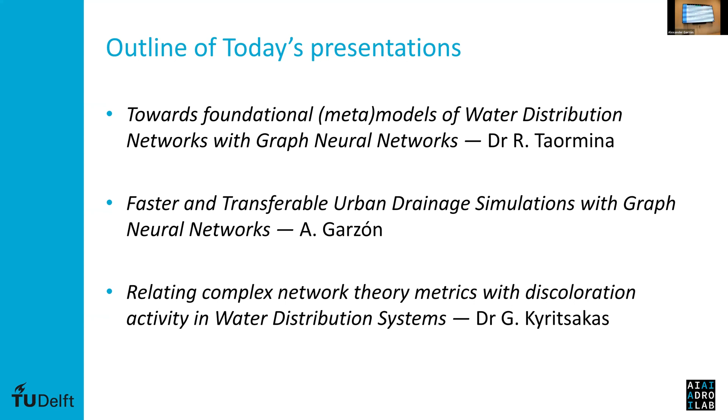So you can see the first talk is going to be on graph neural networks to build meta models for water distribution networks, which is a type of water network. Then Alex is going to have another talk in which he also mentions transferable meta models, but for sewers, urban drainage. And then lastly, we go back to water distribution. A different application now is not going to be graph neural networks, but it's going to be complex network theory along with machine learning methods to solve an important problem in water distribution networks again.

Now, the first part should be like a generic introduction to the topic, because I guess the audience is very varied. So yes, urban water networks and why we want to use graph machine learning. That's the first part of the talk. So let me give you some context. We are in the urban water cycle. Okay, what does this mean?

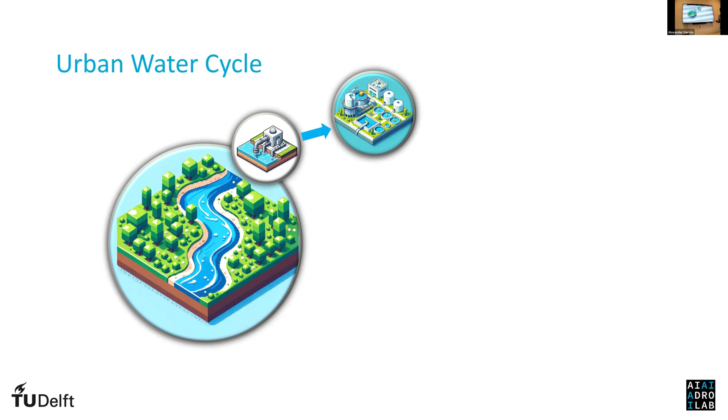This affects everyday life, including bringing water to firefighters when they need to extinguish a fire. Usually you have a source of water; in this case it could be a river, could be a lake. In some parts of the world it is actually the sea itself with desalination plants. It can be the groundwater. So we have this source of fresh water, and then we have water that needs to be treated to become potable, drinkable, and then it can be sent to cities via transmission pipelines.

And then we have our city here, and we need this water to do everything essentially, for our households, industrial processes, commercial, anything. We really depend on drinking water. We consume this water, this becomes wastewater, and we need to get rid of this wastewater and bring it back to the environment. But we need to treat it first in wastewater treatment plants, and then we can release it into the same river, hopefully downstream, so you don't have to drink what you just treated. And that sort of closes the cycle.

We need an extra component, though, because, especially in the Netherlands, we have a lot of rainfall, right? So this is water that falls on our streets, on our roads, on our buildings. And it gets polluted because there is a lot of pollution in the environment around us, and needs to be treated as well. And ideally, it then needs to be shared back with the environment with a concentration of pollutants or pathogens low enough for safety reasons. Okay. Now, this is all the urban water cycle, and that's already a lot.

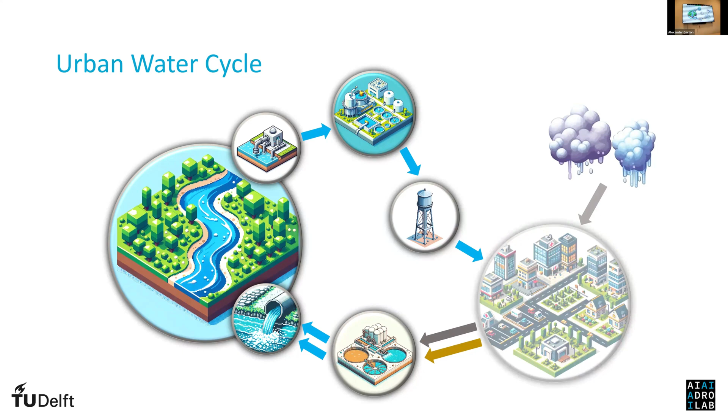But when we talk about networks, we focus on this part alone. Urban areas. Why? Because we have this water treatment plant, we have drinking water, this water comes to our city, and then is distributed using a network. It's not done point-to-point, because it would be very inefficient. And this is the same as power distribution, road networks, telecommunication. Indeed, we have a network. And when we talk about delivering drinking water, we have a water distribution network or water distribution system. So we want to deliver water with high quality to as many people as possible, and with sufficient pressure. It means that you open the tap and the water comes out.

So it's not just the quality of the water, it's the quantity, it's the energy linked to the water, because pressure is, of course, related to energy. And from the sources to any type of user: residential, commercial, industrial, sometimes also farms, and so on and so forth. So this is the first type of urban water networks.

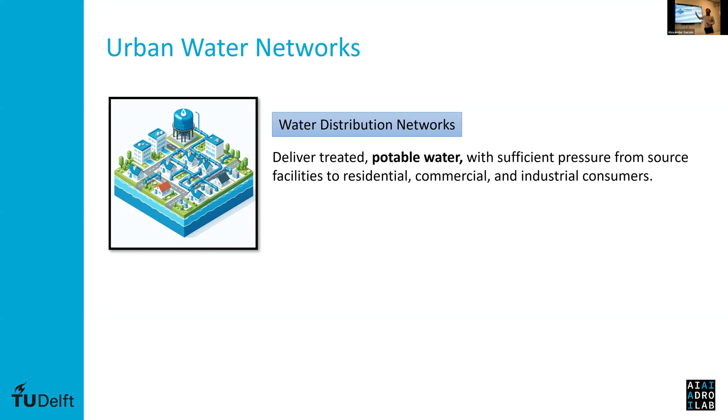This is like the light side of the force, some people call it, because then we have the dark side of the force, which is sewage. So this is everything that I mentioned when you close the cycle, right? You use this water, you produce wastewater, and for sanitation reasons, you need to take this wastewater away from cities, of course. And that's why it's also called the dark side of water networks.

But we also mentioned stormwater, because we have rainfall. Rainfall washes off these pollutants. We want to avoid sanitary problems related to that. We want to avoid situations of flooding. So we need to take this water away too. We collect it first using sewers, and then we take it away from the urban areas.

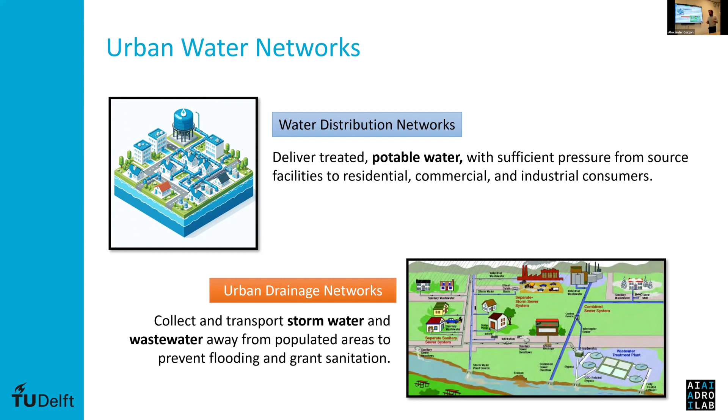Now, sometimes, especially in places like the Netherlands, you have these two functions, the wastewater or sanitary sewer and the stormwater sewer, connected. We have slightly bigger pipes. They're called combined sewer systems, mainly because the Netherlands, for instance, is highly densely populated. So it's actually quite impossible sometimes to have two pipes next to each other. You only want to have one. And that's why, if you're in the field, more often than not, you also hear the term combined sewer systems.

Now, regardless of the networks that we're talking about, these are physical networks. I don't know your field, but a huge part of graph and data related applications deal with non-physical networks. So here it's pretty much different, for many reasons. I'm going to list a few. Our node and edge features, these attributes, actually do have physical meaning. Pipe diameters have a physical meaning. Flow rates, the amount of water flowing into a pipe, have physical meaning. Same goes for the fact that physical systems have to obey physical laws. As such, we need to follow the laws of fluid dynamics for a water network.

These laws are very different if you think about a social network, where it's not physical; user behavior or social norms, you cannot call them physical. They're still very important laws, maybe less understood, but a big difference. Another big difference is consideration of spatial relationships. Literally, if you have a pipe which is a kilometer long, there's going to be much more energy lost carrying water from point A to point B than if it were 10 times smaller. So there are physical implications.

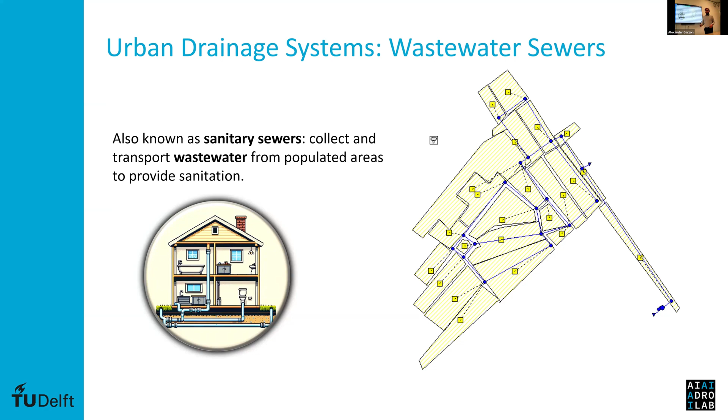And as I said before, we have stormwater sewers. They take runoff generated due to storms and rainfall away from populated areas to avoid flooding conditions, as you can see here. Then we have wastewater sewers, also known as sanitary sewers. And as I said before, you can imagine all the wastewater that we produce in the household, in an industry, in a commercial building, and this has to be carried away from the city after being collected using this network. Then we have the possibility of combined sewer systems, as I mentioned before, okay?

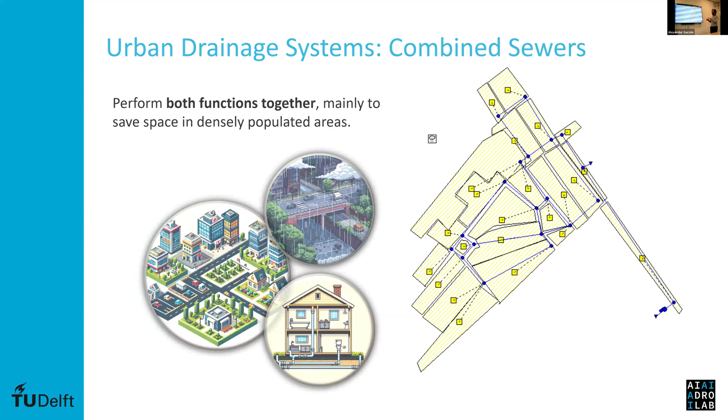Now, I don't want to spend too much time defining the node and edge features that we have for this type of system. Some of them are the same, okay? At least those that you need to know for the rest of the presentation, and I guess Alex is gonna provide a little bit more later on. But in general, these systems are actually more difficult to model than water distribution systems. The dynamics are more complicated, so just bear this in mind. We don't have too much time to go into that, unfortunately.

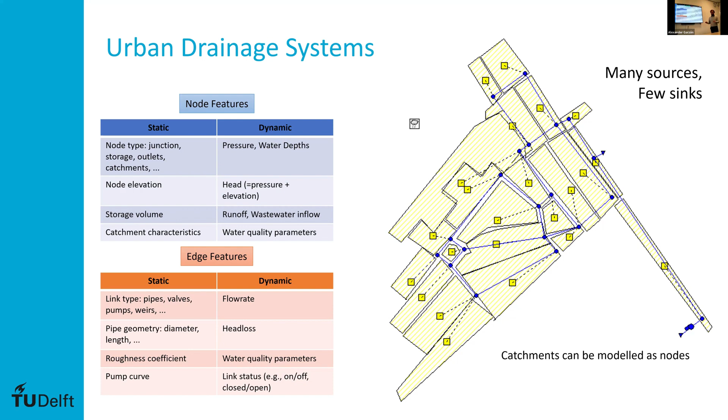Now, what's next? Now we move to graph machine learning. We defined these networks, right? Why do we want to use graph machine learning, which is going to be this talk and the next talk, and somehow also your talk? There's feature engineering in between, but I think we do it a deep learning way, end to end. Of course, we are dealing with networks. We want to exploit the inductive bias of this data being a network in itself or coming from a network, right? So we use graph machine learning. We exploit the important information that we have on this structure, rather than giving it away if we use machine learning models such as multi-layer perceptrons or random forests or extra trees and other types. So it should make a lot of sense. Okay.

Hopefully I will convince you more in the next slides. Now, we want to do graph machine learning, so we can do some specific graph machine learning tasks in these water networks, regardless of whether we have water distribution or urban drainage systems. What are the most common? A very important one is state estimation.

I think it has many synonyms from place to place, from application to application. But in our case, what we want to do is to infer the state of the network, meaning that we would like to know the head or the pressure and the flows everywhere in the network, ideally, from a few sensors that we can deploy in the system. Usually we're dealing with continuous variables, so this is a problem of node or edge regression.

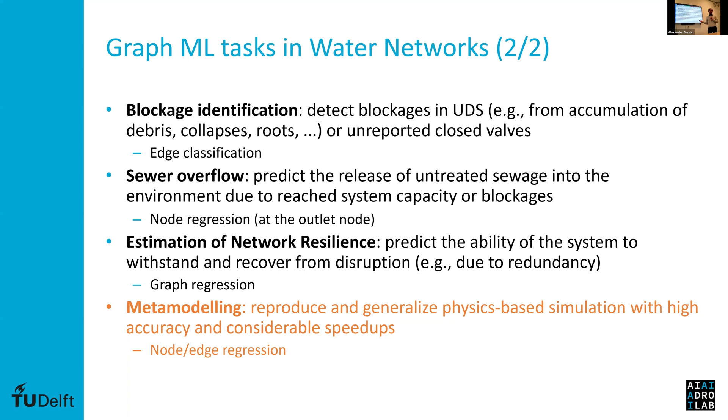We want to reproduce and generalize this physics-based simulation on a network with high accuracy and also considerable speed-ups. So we want to run it 10,000 times faster, 1,000 times faster. It's also known as surrogate modeling. So maybe you heard it before, this idea of building a model from a model. I hope in the next slides I will show you why this is indeed important. And this is the second and last part of my presentation. I hope it's not too long already.

One of the goals of AIdroLab, among many, maybe too many, is that we want to build transferable meta models for these water distribution networks. We'll unpack this in the coming slides. This work is being mainly done by one PhD student who is affiliated with AIdroLab, Bulat Kerimov, although he's doing his PhD at NTNU. So I'm presenting mainly his work.

If you go on any website of any provider of software solutions or sensing solutions for water systems, it looks like we are working with machines as sophisticated as Red Bull's super fast cars. They show these amazing graphics with different variations of this AI-generated drop of water with a wireframe, or a pipe with a wireframe, as if everybody's using AI to build these digital twins in the water sector. You heard the word many times, right?

If you look at these websites, if you go to these conferences, it feels like this is pervasive. We have so much data coming from this network, very high quality data. We can do everything with it. We have a sophisticated SCADA system that you don't even have in a shuttle, right? If you just look at this sort of advertisement. It is not true because, where is the data?

In a conversation with Elvi maybe two months ago, at one of the other meetings, he was a little bit surprised by the density of sensors, that is, how many of these edges and nodes we're actually measuring, okay? There's 3. I would say you'll be lucky if you have one sensor every 1,000 meters of pipes, okay? Usually, not always the case, but yes.

So I work with a lot of networks from the UK, one of the water utilities there, and what you see is that they usually have 3 sensors. They have a flow meter at the beginning, where they measure how much water is coming into the system. Then they have a pressure sensor in the most important part of the city, the city center, where you really want to ensure that the pressure is good, maybe the most populated area. And then you have another sensor at the so-called critical point, where the pressure is the lowest.

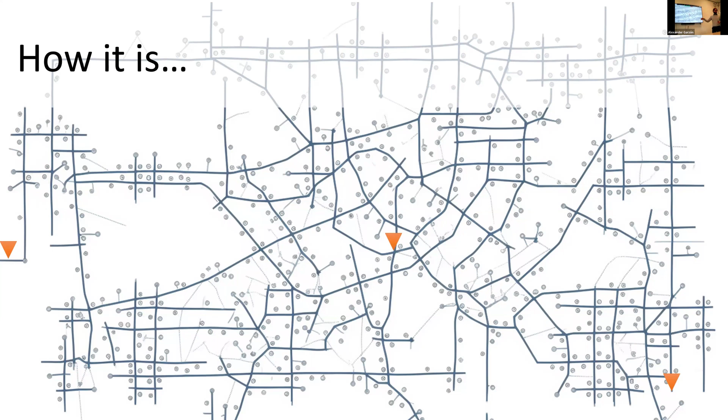Because if it's high enough here, you can expect that most of the customers are getting water. This is it, right? This is the reality, okay? And this is the UK. It's not where you actually have more need of sophisticated techniques to improve water management, right? So this is puzzling, but this is the truth. Therefore, what can we do, right?

What I mean by this is that GPT, this foundational model, sees a huge amount of data, and then we can use little data for a specific case, because the data seen to build ChatGPT from GPT is orders of magnitude less, right? A lot less. Maybe we can do this, okay? But where do we transfer from? Meaning, can we actually build a foundational model for water distribution networks? So this is the main research goal of this line of research that we are following at AIdroLab.

Now, imagine we have a lot of different networks. Usually, we don't have data from these networks, but we sometimes have calibrated numerical models for them. So I'm a water utility, maybe I have only a few sensors, but since we're dealing with physical systems, there are laws, and you can solve the related equations numerically, and use the little data that you have for calibration. And then you say, well, it's a physical system, it has some sort of reliability, although this is synthetic data most of the time, okay?

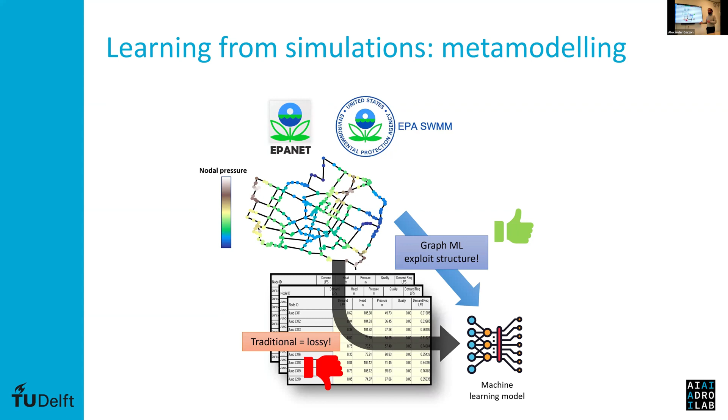Anyway, so this is how we can learn from simulation. We have a model, we run it, we get data from it, we use it for training our graph neural network. And again, now I'm going to focus mainly on water distribution systems. As I said before, these numerical models solve a set of equations. So what are the equations? The basic physics, let's say, behind water distribution systems under certain conditions, of course, with some assumptions.

We have the conservation of energy that we need to respect. By this, we mean that the difference in the energy measured by the head, which is one of the variables that I defined before, you can think of it, again, as the pressure plus the elevation. The difference between the energy in these 2 points is equal to the head loss, the amount of energy that we lose because the water passes through the pipes, due to friction.

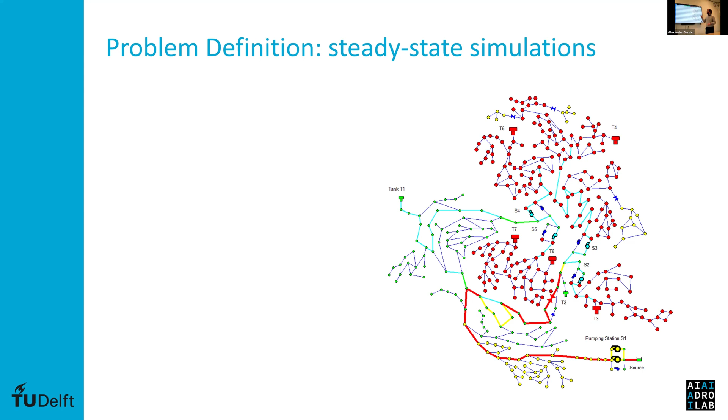Okay, so let's define the problem. We want to learn from simulations. Which type of simulations? We start with steady state simulations, which in the case of water distribution systems can help us solve a lot of problems. It's very different from urban drainage systems, where we usually don't have that luxury. But in this case, yes. So what is the problem that we want to solve? Given inputs, inputs being, of course, the network geometry and the characteristics of the network, the water demand requested by all the nodes of the system, which can usually be estimated, more or less, right?

And then we need to also know the intrinsic energy that the water has, the starting point, which is basically the amount of energy that we have at the reservoir, at the source of the water distribution system. That's the source of water. In this case, let's say we have a water treatment plant, and then there is a big pumping station that pumps this water with a certain energy.

The more energy that we have, of course, the more we can deliver water far away in the network. But of course, if it's too much, then we break the pipes and it's not great. So that's another problem that we're not going to discuss today. So given these inputs, we want to determine the pressure, usually at all the junctions, ideally, and the water flow in all the pipes, okay?

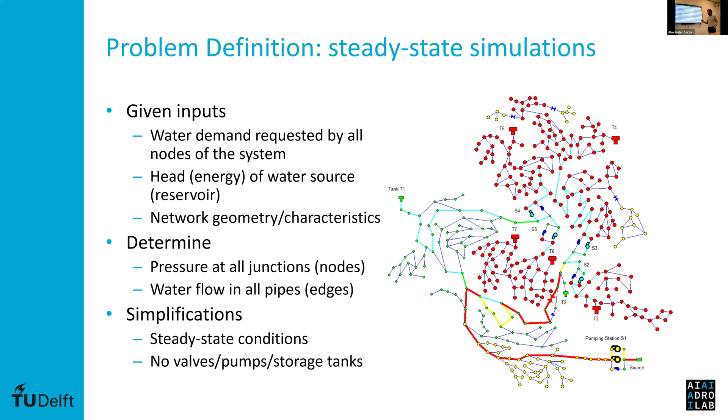This is solving, we say, a water distribution system with simulation. Simplification, as I say, steady state conditions, and we don't have any valves or pumps or storage tanks in this part of the study because we wanted to start simple. So this is one thing, but then we don't have to forget that we also want to build these transferable meta models, as I named them.

So what we do, we run several simulations in EPANET on different case studies. Then we train a GNN to reproduce this simulation. And since we want to really tackle this transferability to make sure that we can do transfer learning after it, we also need to see whether the GNN can actually be trained on multiple case studies simultaneously, so different networks, and is able to actually learn shared representations which are meaningful. Okay, so this is the problem that we want to solve.

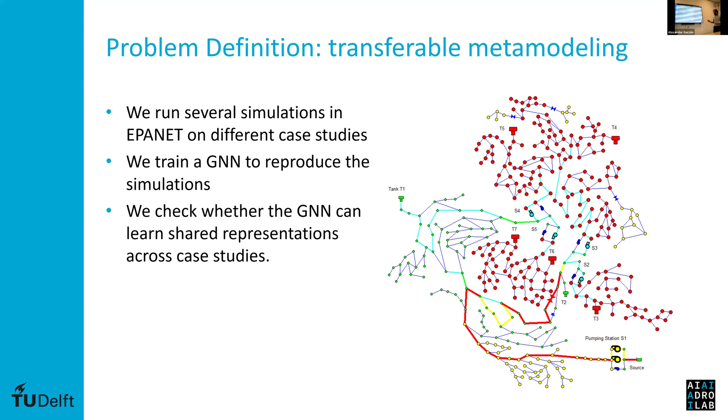Now the way that we tackle it, the first thing that we did is to use, I call it node-based GNN, but it's the traditional GNN that you might be familiar with, like graph convolutional network. So this is the first paper related to this work. Basically, we utilize an encoder-processor-decoder. I guess you might be familiar with this standard architecture used a lot when dealing with physical systems.

So these are all the input features, on top, of course, of the connectivity that is intrinsic, that is handled by the GNN because the processor is a GNN. As I said before, reservoir head, so the energy at the starting point, nodal demands, which are driving the simulations, node elevation, because gravity is important. And these are for the nodes.

For the edges, we have the length of the pipe, a static feature, the pipe diameters, another static feature, and the roughness of the pipe, another static feature. Why this? Because this is important to compute the head loss, which is going to then affect the energy that we have in the system and have consequences, of course, on the water that we can deliver. So we encode this information.

We have some first stage hidden representation that we elaborate using a processor which is made of n layers of a graph neural network. I think in the first paper, actually, we used a ChebConv. So it's more like different neighborhoods that we can go up. But of course, it's equivalent to having a graph convolutional network, more or less, with only one hop, so only looking at the direct neighbor, and then stacking them on top of each other.

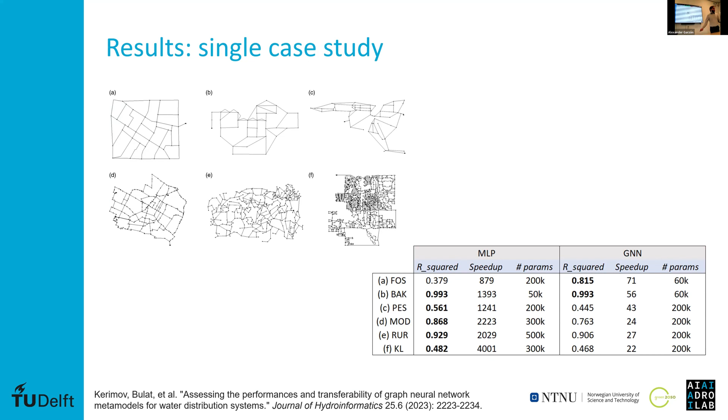So we don't really get very good results, but we start seeing that if you start feeding more data, and if this data is more balanced, since smaller networks with fewer nodes end up being less represented because the loss is computed at every node, there is some room for improvement. So this gave us a little bit of hope that we can move forward. But how did we move forward?

We completely changed the architecture. We moved from a node-based GNN, which is a typical way of doing it, and switched things around to focus instead on the edges. Before, we wanted to predict pressure, which is a variable at the node, and then reconstruct the flows. Now what we want to do is predict the flows and then reconstruct the pressure. And we will see why we had this intuition.

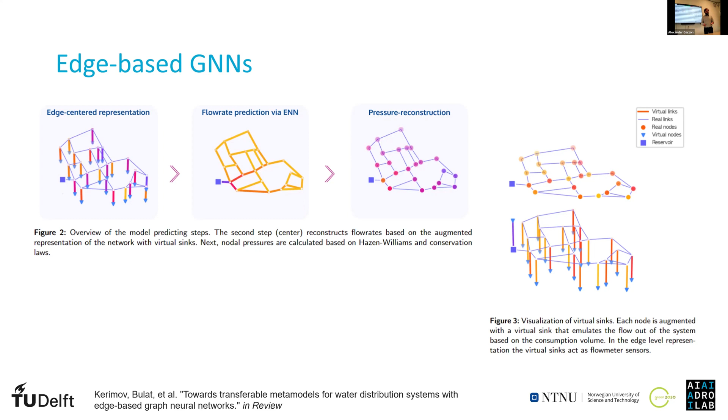Basically, especially in the case when we only have one source, you start from the assumption that you are always able to meet the demand. What this means is that the sum of all this is essentially the flow in this additional pipe here. It has to match, okay, if there is no leak. So we're still under certain assumptions, of course. And by doing this, we can actually operate at the edges.

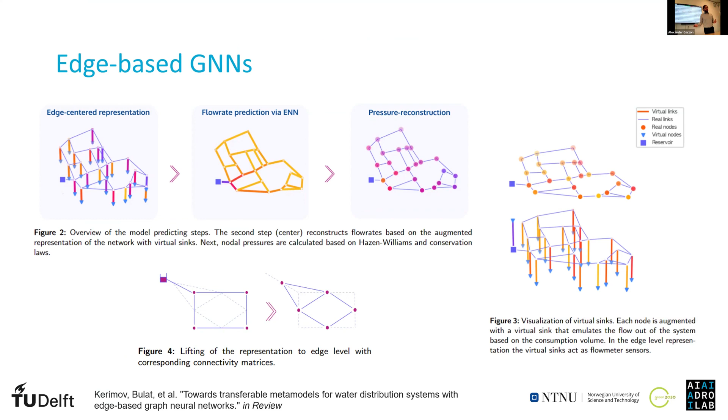Actually, I invite you to read the paper, which is here. By doing these convolutions now on the edges, basically we enforce somehow this conservation of mass. So if you look at the formulas in the paper of Bulat, there is an even stronger reason behind why we are using this. Well, the paper has been in review for 3-4 months already, so hopefully you will be able to see it soon.